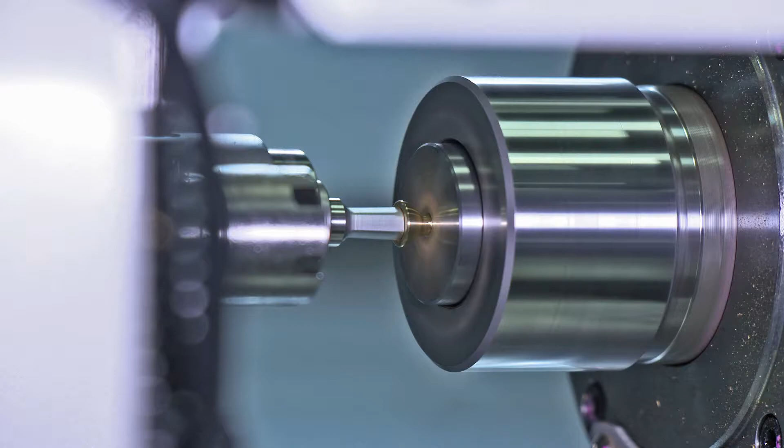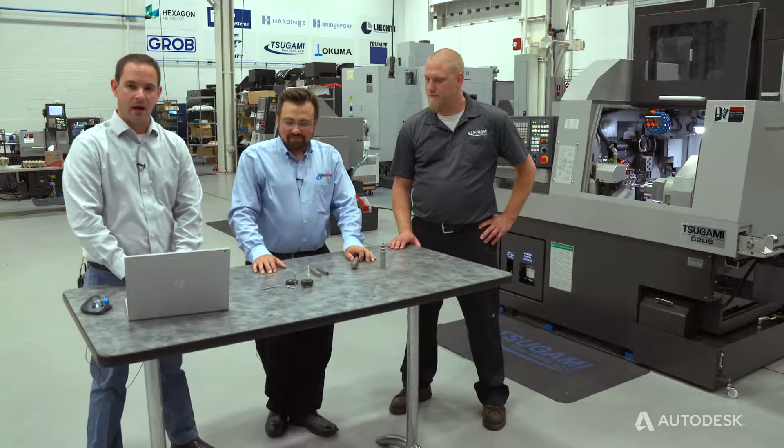Hi, Brian Denola here from Autodesk with Scott Laprade from GenSwiss, tooling supplier, and Derek Briggs from Tsugami, Swiss machine tool builder and distributor. And today we're going to talk a little bit about the final process in making this screw: broaching. When you have to manufacture a screw, on the back of the head you need a place to put the wrench, and in many cases you can't have radiuses in the corner of the hex or hexalobe. So you need to use another process. We can't mill it, we can't turn it. In this case, we can broach it.

So Scott, why don't you tell us a little bit about broaching? What are the steps in the process, the requirements, what's unique about this holder you have here? Sure. Yeah, rotary broaching is a very powerful process. Basically, any screw that you might manufacture in your CNC Swiss needs to have some form of a drive feature. So what the rotary broach does is allows you to cut and shape the drive feature into the end of the workpiece while the spindle is rotating. This saves you a lot of time. You get very clean finished forms.

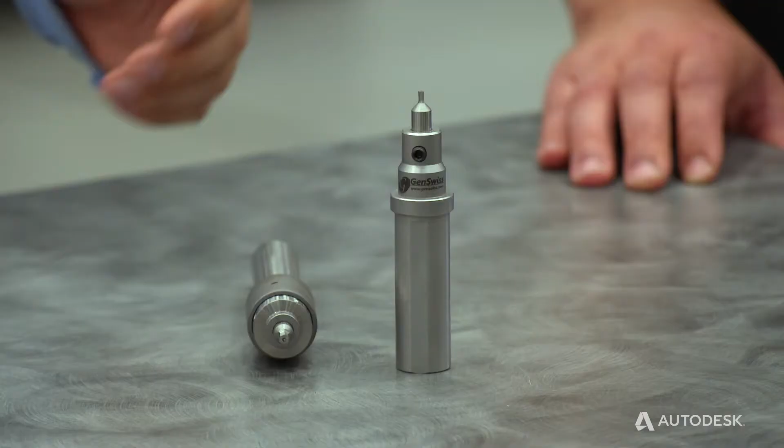Occasionally you'll hit applications where a rotary may not necessarily be the best way to go, where maybe you have a very deep socket you need to generate, or there's external features on the workpiece that need to align to the drive feature, in which case, being that this rotates, it's very hard to give it a known location, where you can very accurately control the orientation and location with a nibble broach or a punch broach.

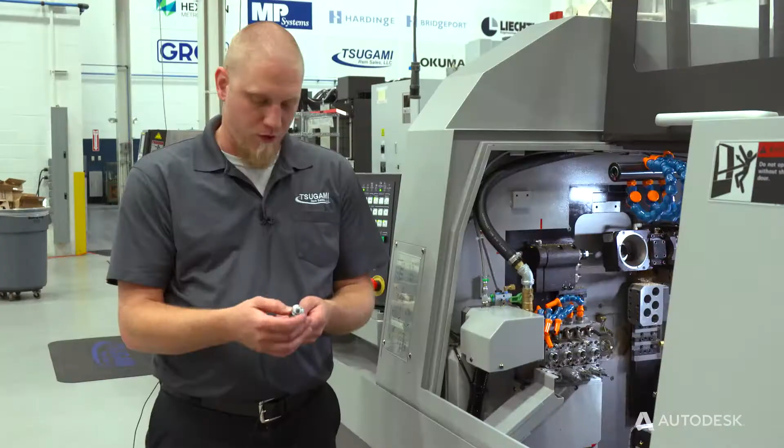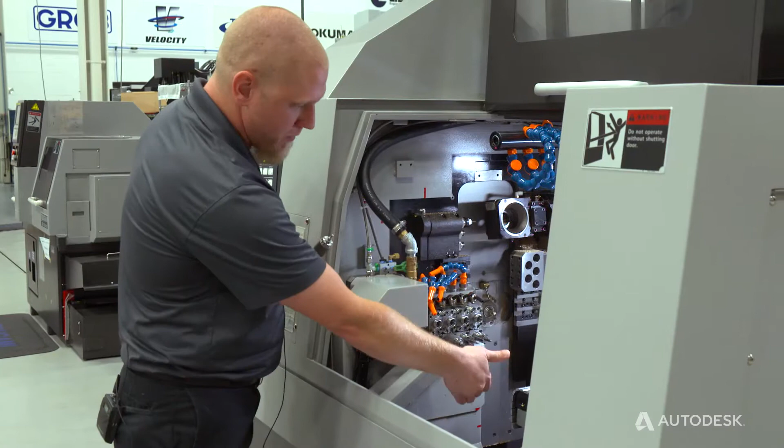The rotary broach system that we're using from GenSwiss, one of the key benefits to this holder and what allows it to be so beneficial is the Y-axis on the machine. On this backworking tool block, it actually has 80 millimeters of Y-axis stroke. So you can dial in your pocket right on center, just like you would a spot drill, a tap, or any other tool. The benefit of this holder is it is already on center.

The distance from here to here is actually a known distance, and it's on center line. Once you have your pocket trammed in for a drill or for a tap or anything, you can pull that tool right out, put this one right in, and touch it off in Z, and you're right on center. You don't have to worry about floating in a holder like the old style broaching tools.

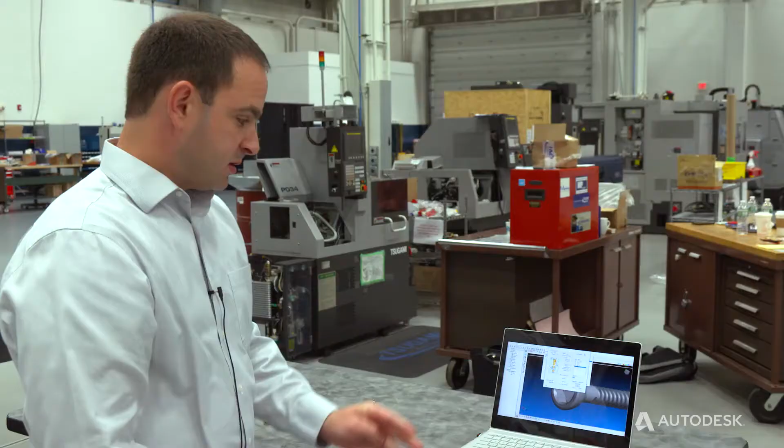So because Autodesk has a specialized Swiss solution, we have specialized processes. So we support 3 types of broaching. Rotary broaching or wobble broaching, like we've shown here today on the Tsugami with GenSwiss rotary broaching tools. We also support static broaching of 2 kinds. Either what we call index punch broaching, where we take a rectangle and punch the shape 3 times at 3 angles to make the hex, or index, or what some people may call nibble broaching.

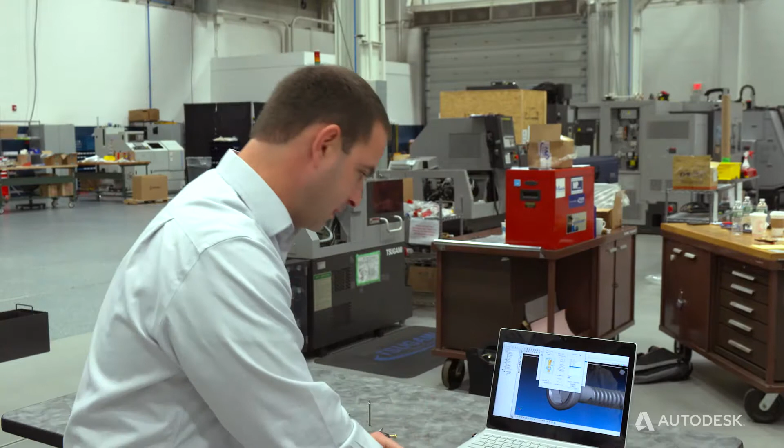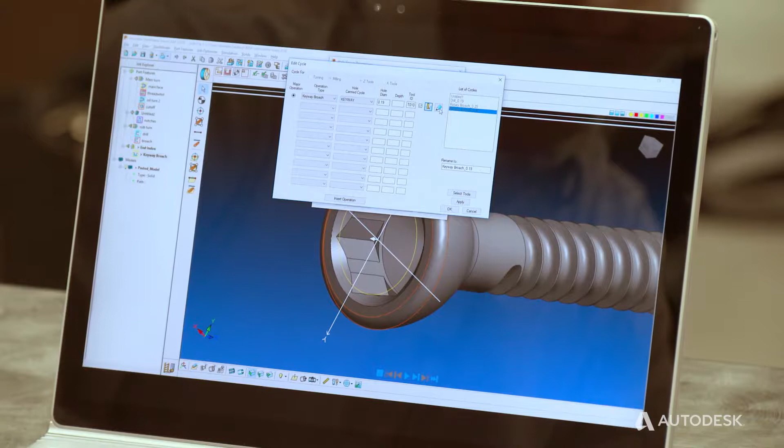So I'm going to show you a little bit of the nibble broaching process here. So we have our tool here. In this case, it's going to be a triangular tool because we're going to pick out those corners on the part. So we can define the shape of our tool so we can have that little corner within the hex on the back of the part. Once we've got our shape defined, we then can go into our process and we can define how we want to axially or radially peck on the part.

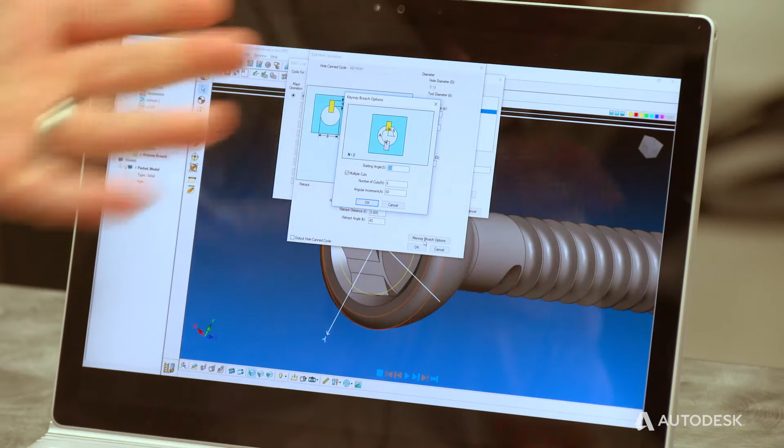And then also, a lot of times when you're broaching, you end up with a burr in the bottom of your part. Well, one of the things that we do here is we enter the part, and when we exit, we have an exit angle, so we can help push that burr out of the part. We also can index around, so we're going to be nibbling out 1 corner. Well, we have 6 corners we got to do. So I can set my angle of increment and my number of indexes and my starting angle here. Once we've got our process all dialed in, we can go ahead and visualize this and actually see the part being nibble broached, nibbling out those corners.

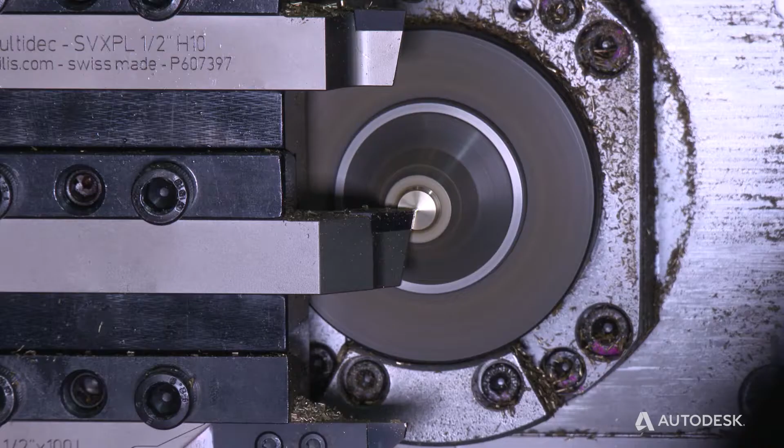The most important thing here to learn is that if you want to machine parts complete on a Swiss machine, just doing milling and turning is not always an option. Sometimes you need some specialty tools.